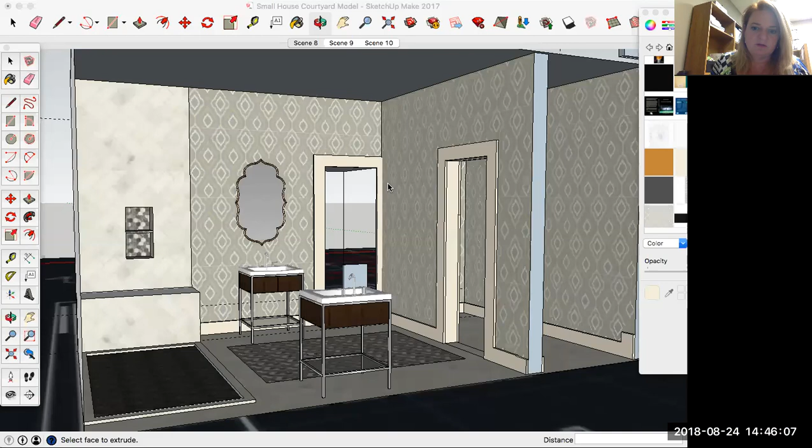All right, so there we go. I'm going to go to my warehouse and do a search for barn door. And then I just kind of look for something stylistically, like what I'm looking for. I believe this is the one that I used in the other room, and most of the doors I use in the house I keep fairly consistent, so I'm going to go back with what I put in the other room.

And just taking its own time.

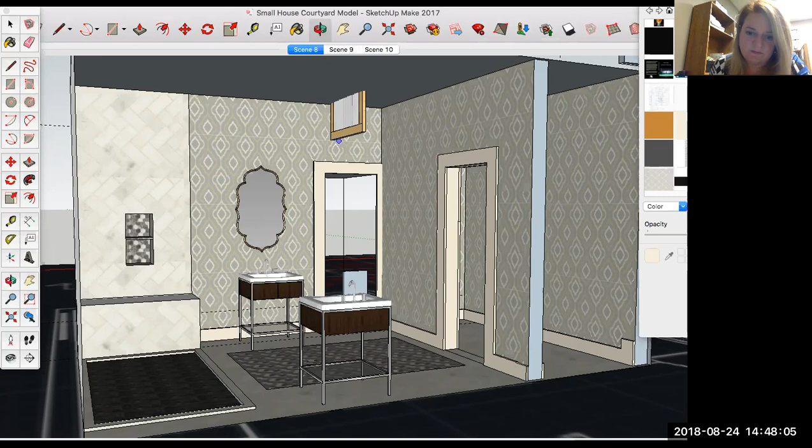Okay, there we go. But I've got it in the wrong orientation, so I need to rotate this. Let me see if it'll let me do it around this. Yep, it will. There we go, and let me move this into place.

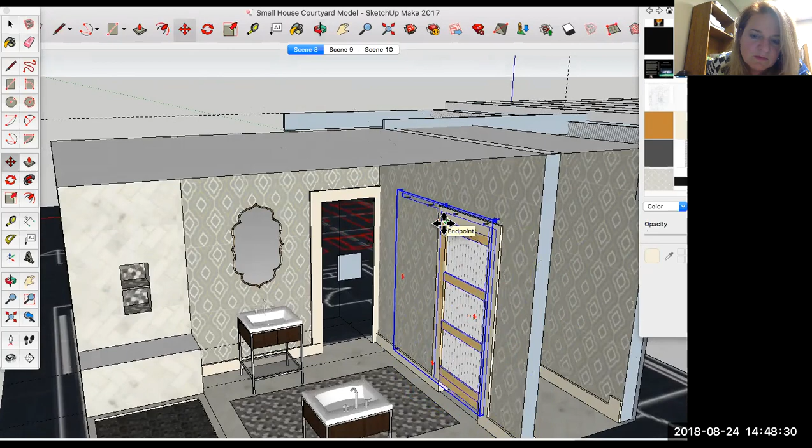I'm having issues today. See, even if you've done it for a while, sometimes it gets kind of moody.

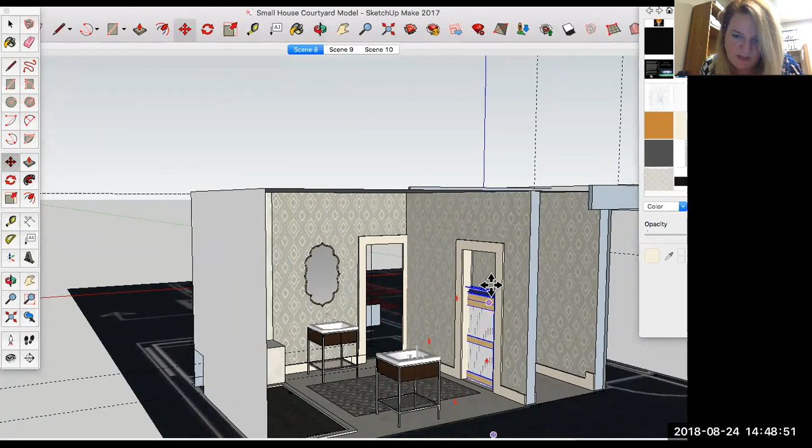There we go. All right, now I don't like the finish that I have on this particular door. The other thing is I'm noticing the scale's a little bit wrong, so I'm going to hit my scale button, take this grip, and just elongate it a little bit.

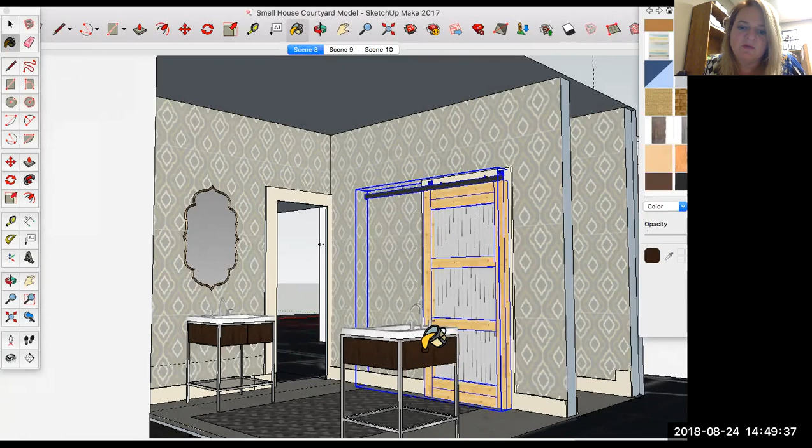So that way it actually fits the door opening. The other thing I'm going to do is go over to my materials and take a sample of that. So what I did is choose the dropper, right here, took a sample of this, and now I'm going to select this until I get good. Sometimes you have to just sit here and click at it for a bit, which is frustrating, but eventually, there we go, it'll highlight.

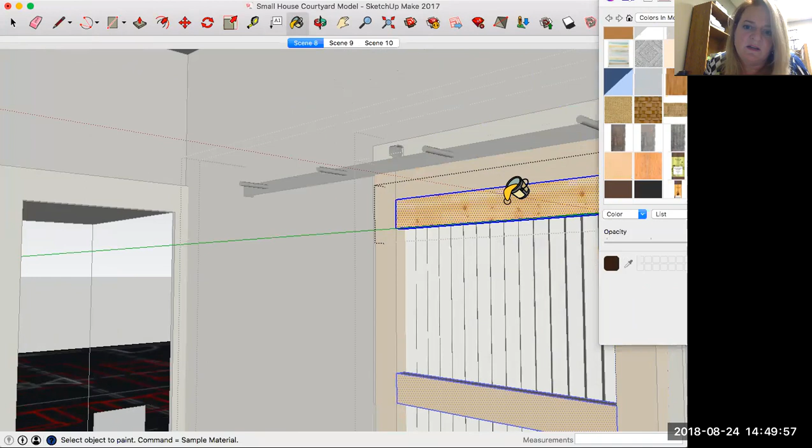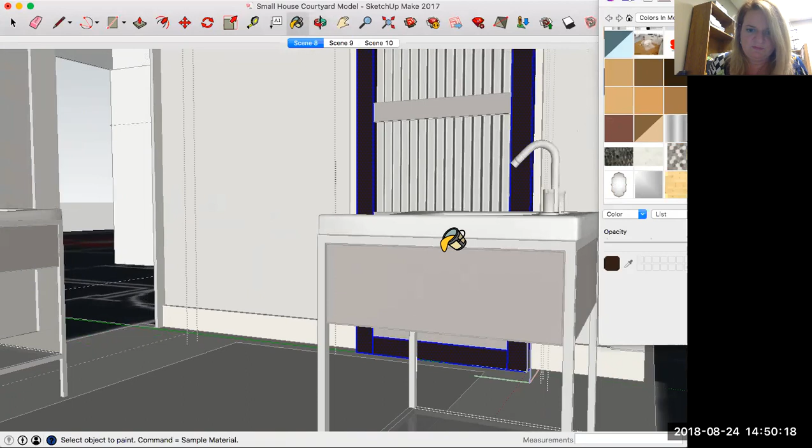And I can repaint this door. Did I get everything? Oops. Yep, looks like I got everything. So, hit escape, and there you go. So I've refinished that door more to my liking, so that looks good.

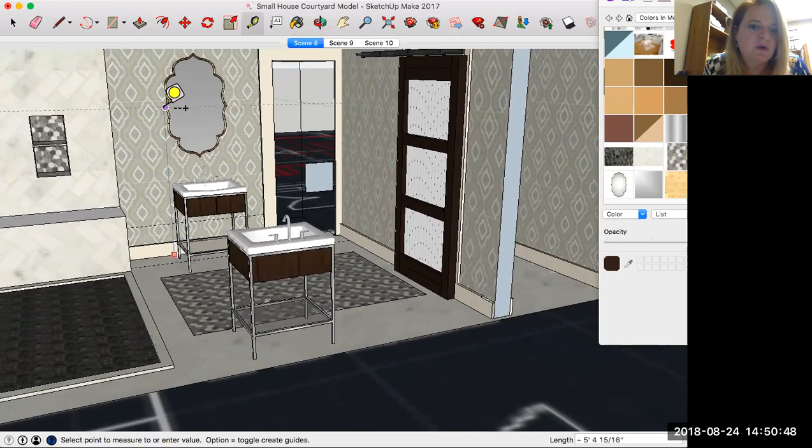I've got my baseboards in, I have my flooring in. Now I'm going to pan out a little bit. I do need my sconces, but first I want to put a guide here. I want to figure out what this is. That is 1 foot 3 inches, so I want to put a guide at about 12 inches. Nope, that's not right. Edit, undo. I want to go from there. It's probably about 8 inches. Okay, and then I want to go from here over about 8 inches.

All right, now I need to find some sconces for this room that are going to look appropriate. So back to my warehouse. This is one of the reasons why I do collections. I can go to my collections and scroll down to see what I have in sconces. Now I may or may not have something that's going to work.

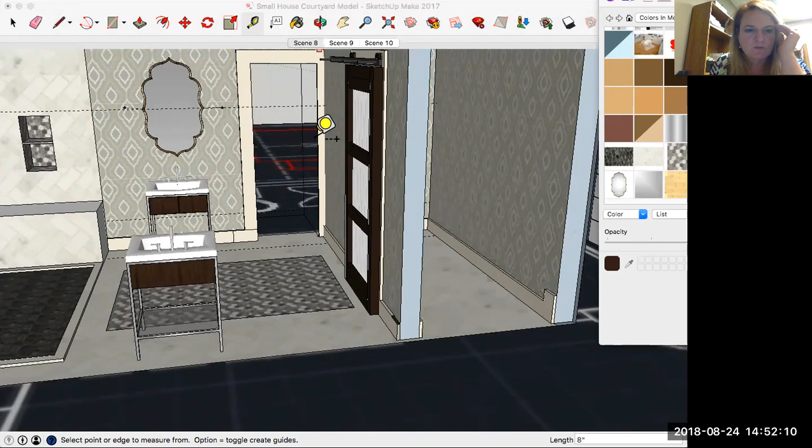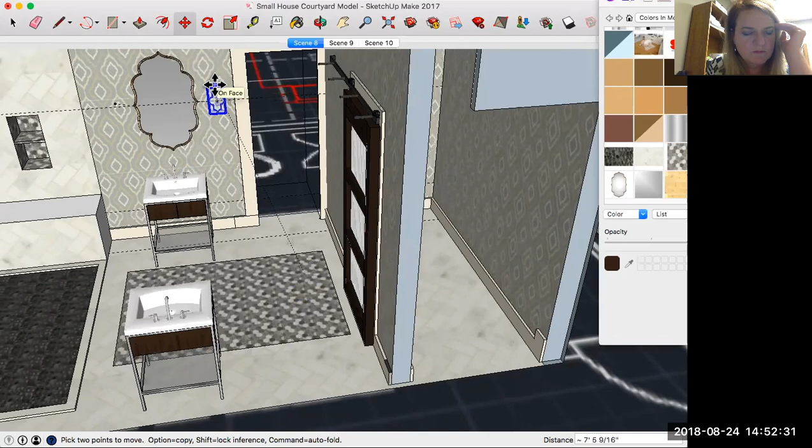Let's take a look at this. So it looks like I'm going to have to rotate this. That actually looks pretty good. So I'm going to go edit, copy, edit, paste. So I got both of these on the face and I have them lined up.

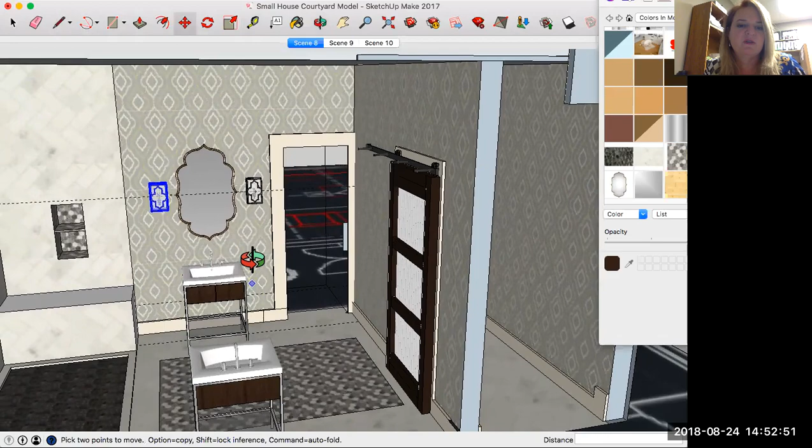I'm going to have the same thing happening over in this location, but I am going to need a ceiling mount, so there's a couple things I need to do. First of all, I want to paint my ceiling the same color. Let me take a sample - that color right there, because I know that's what my trim is painted, and that's what I want my ceiling painted.

So that's taken care of. Now, the next thing I'm going to do, once it stops loading, is go in and find a ceiling mount.

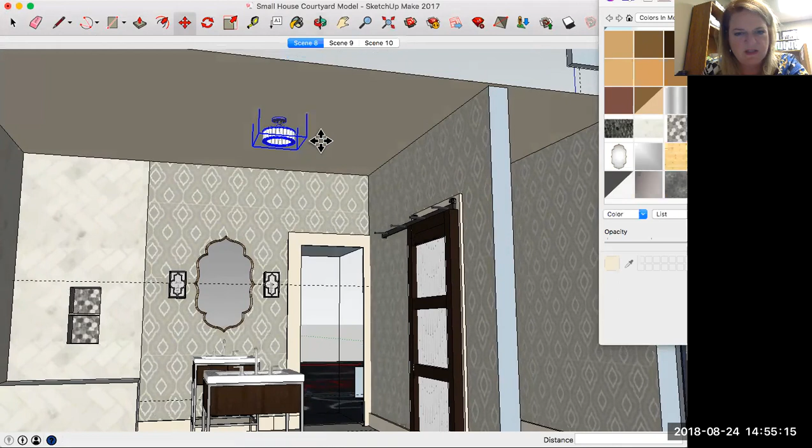Okay. Yep, looks like it's right. Although, scale-wise, it looks wrong, so I'm going to delete that and try to find something else.

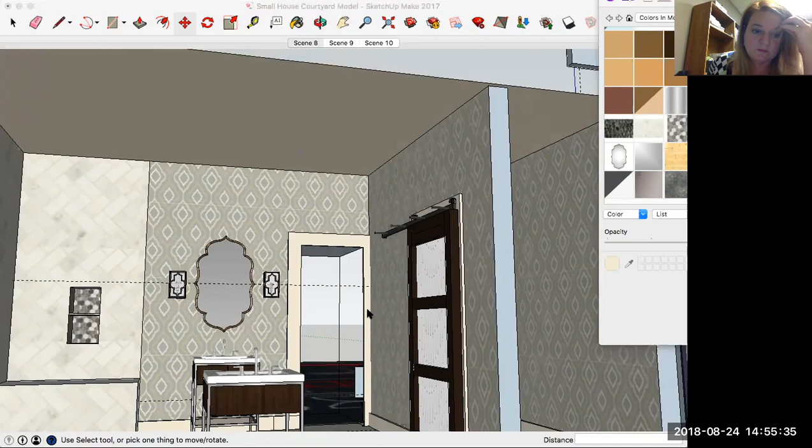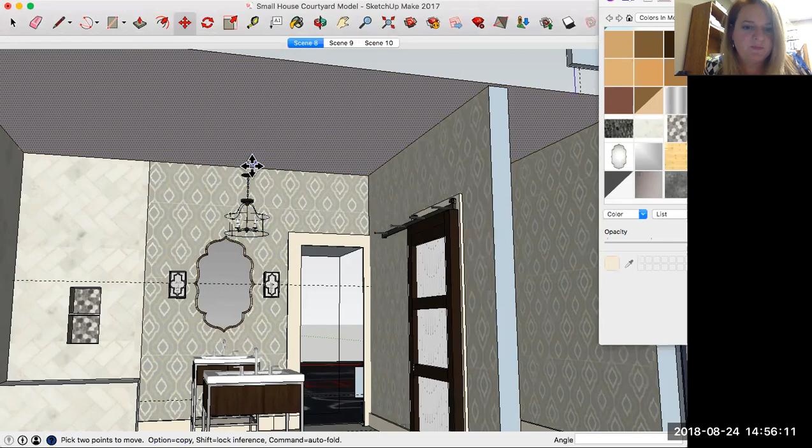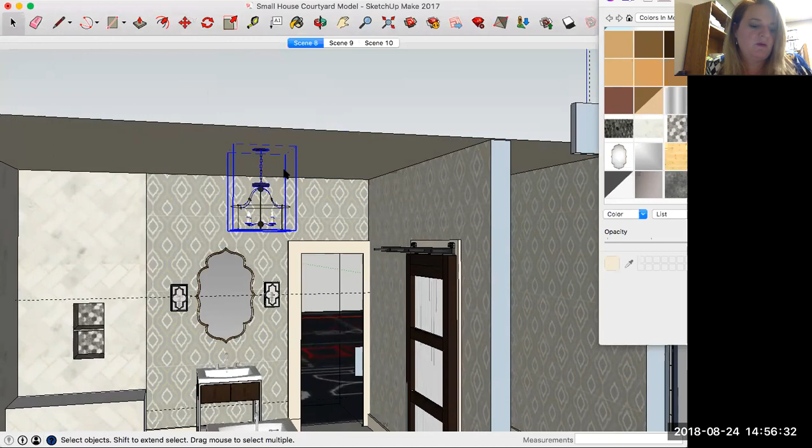All right, let's try this. Oops, that's not what I wanted. And I'm going to edit - oh, actually, meant to select it. Copy. I'm going to come into the powder room and put the same thing up in here. Edit, paste. There we go, and that should be plenty of light for this particular environment.

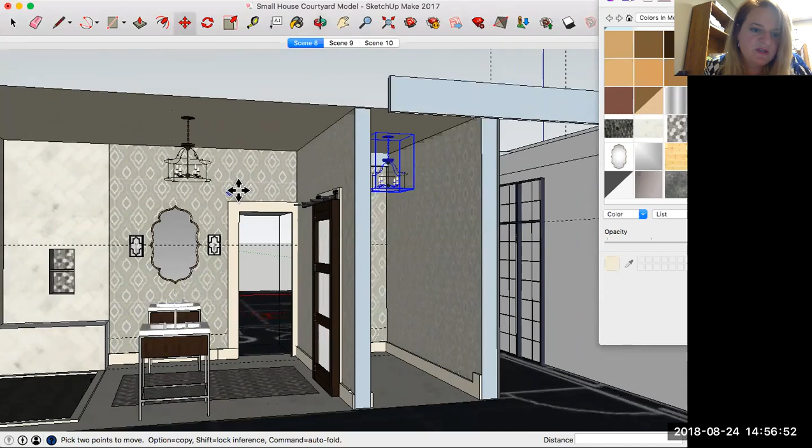Now I'm going to do some accessorizing, which is a little tedious, but I'll go into the 3D Warehouse and import things, and then I will come back and show you the finished product when I'm done.